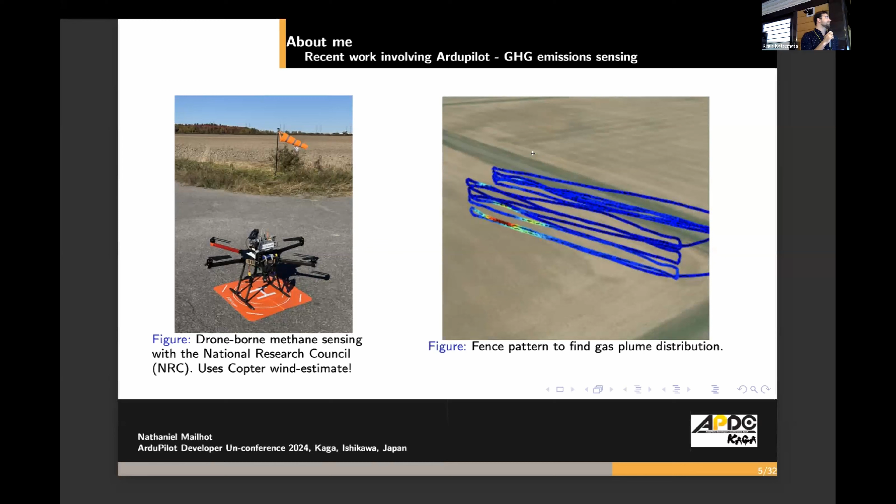With respect to my work with ArduPilot more recently, we've done work doing greenhouse gas emissions detection where we mount a methane sensor onto a drone and we fly patterns to try to characterize gas plume distributions. So that's one example there. And for some more recent development work for ArduPilot, we're trying to take the bendy ruler avoidance algorithm scheme that was used for the Outback Challenge in 2018.

And we're trying to convert it to use more of a Lua scripting framework. So if you're familiar with the ship landing feature using Lua, we're trying to use that as our example to start with and then build out the old plane avoidance features using bendy ruler as a Lua script or a set of scripts. So at this point now we have the obstacle generation working.

We can communicate between ArduPilot and Lua to discuss obstacle state. And we're able to see if it's clear to proceed versus if there's an obstacle in the way. And now we're trying to work out how to do the actual avoidance calculations and control using Lua. And so that's what we're working on now.

Okay, so to my development work, this here is our electric unmanned weight shift control aircraft. When I say weight shift control, I'm talking about hang gliders or air trikes. So completely different than the normal fixed wing planes that most of us use for ArduPilot. Why these? It's just flat out, no one's done it. And we think that they have some pretty interesting qualities that are worth developing for or to use eventually.

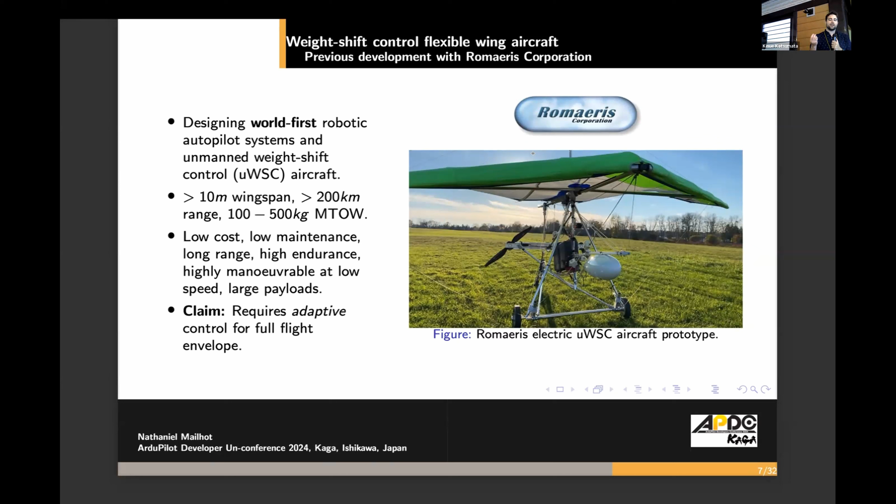They're extremely low cost. They're extremely low maintenance. They have long range, being a larger plane, and high endurance since they're a glider. And you can also maneuver them at low speeds thanks to their weight shifting control and the large kite wing on top. The challenge with these aircraft, though, is it's very difficult to model a flight control, partially because nobody's done it, and the aircraft dynamics themselves are quite nonlinear.

So let me explain what I mean by that. These aircraft, like I said, they don't have control surfaces. It's a big kite, and you're shifting your mass underneath to try to change your attitude. And you're moving your mass sitting in the seat under the wing in free space. So you grab the bar, and you're literally doing like this. So it's a completely manual control.

There's not yet fly-by-wire systems to control aircraft like this. They just flat out do not exist yet. And part of the challenge that the company perceives, company being Romaeris, is it's tricky to learn how to fly these as a pilot. So even if you're an experienced or seasoned fixed wing pilot, when you then go and try to become a weight shift pilot, it takes tens or 100 hours just to convert your pilot brain from fixed wing to weight shift fixed wing.

And a lot of it is fly by feel. Putting that in a technical way, there's substantial time delays to the control, and you have to be precise. So you can't be too slow and you can't be too fast. You have to be just right, to put it in a fuzzy sense. Flying these is a lot like driving a motorbike. Like you have to kind of lean into your turn and then lean out to turn correctly without falling over. And that's actually a challenging control problem.

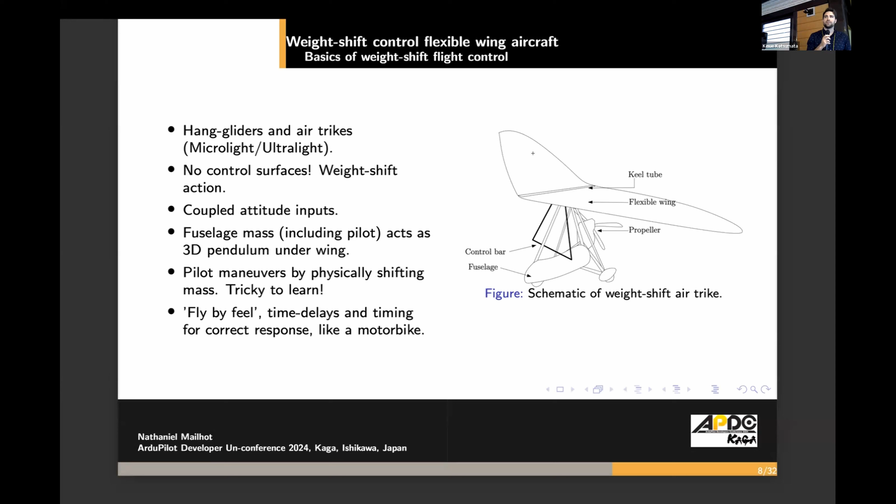So just to drive the point home, here's an example of a banking turn. Your pilot applies a force on the control bar. You shift your whole mass under the wing one way. And then after a couple of seconds, the wing starts to rotate and you initiate a bank. It's a bit more complicated than that, but that's the basic idea. You're creating an imbalance that causes the attitude of your wing to change. And then you have to get yourself out of that changing imbalance that you just started to put yourself back into a balanced state or a trim state.

So our development, it was tricky. It's like, no one's done this. There's no hardware for it. There really isn't much literature on it because no one's done it. How do you start? And so we have experimental and shop efforts, but part of the problem is it's expensive. We can't take a big risk you normally could for prototype development because we're not quite sure how to do it and we don't want to wreck our wings. And in the case of manned aircraft, we can't put the pilot in harm's way.

So one idea was obviously, can we use simulation to replace flight testing and development? And the answer obviously is no. You can't just simulate your aircraft and say, yeah, that looks good, it'll work in real life. You just can't match everything that reality will throw at you. But it does present an opportunity, which is you can refine your models as you go over time to try to get closer and closer to real life.

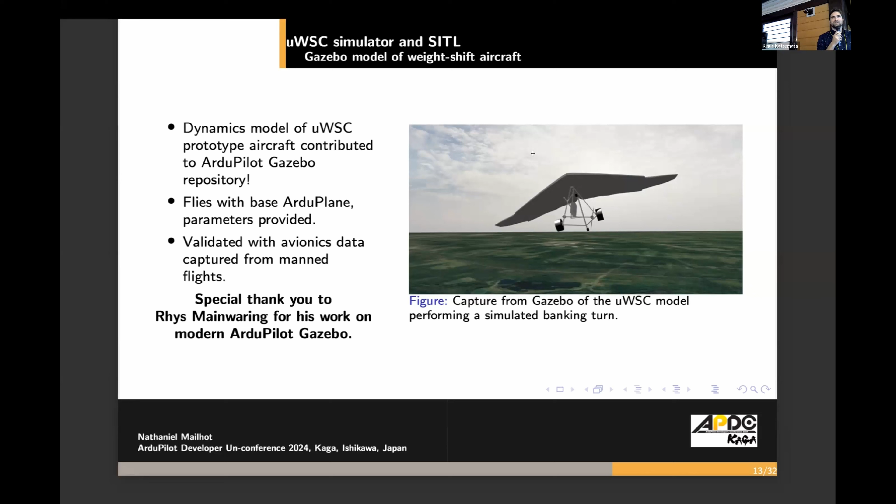Well, before that, I just want to say if Rhys is listening, special thanks. He really helped out with this work and kind of helping me get up the learning curve. And not only that, I think he's been kind of the sole Mac OS Gazebo developer guy the last few years. So big shout out to him if he's listening. And if you know him, tell him I said thanks. Yeah.

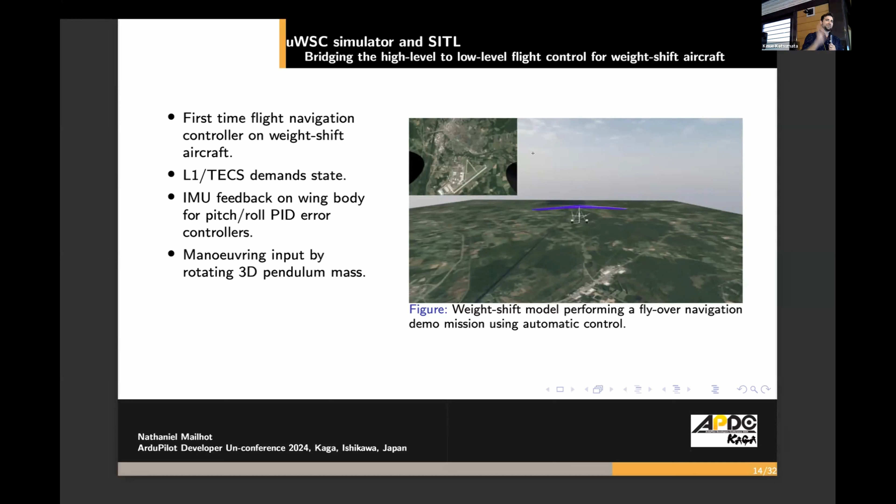And what's important to highlight is unlike the fixed wings with control surfaces, the tricky part is our control has to move a pendulum swinging underneath the wing in a certain way. So it's a little more tricky from a dynamics perspective than what you would normally just say, here's my model for my control surface. And if I do this much command, I'll get this much response at that speed.

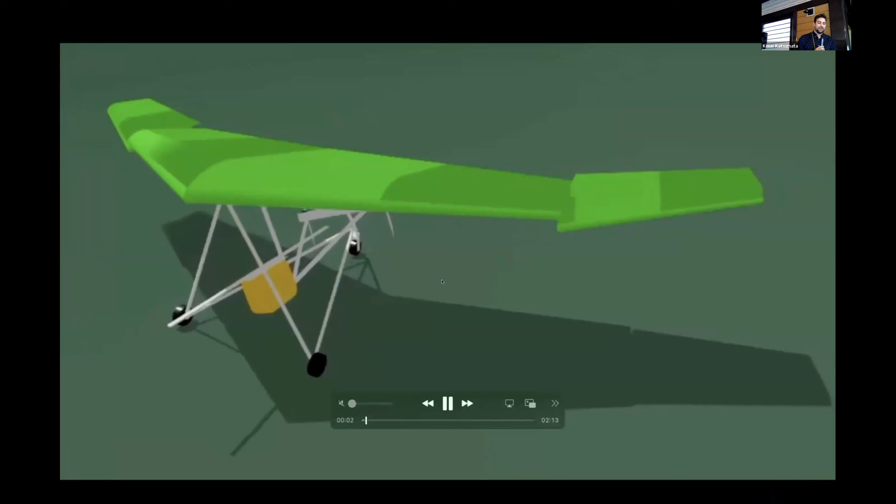So just before we get too into it, just a little video break. I wanted to pull this up just to show an example of a city environment in Gazebo. And we're flying little planes, like a demo mission using Gazebo, or maybe you have some visual sensor of some kind. So then here's the unmanned weight shift control model moving the pendulum underneath in roll, then in pitch.

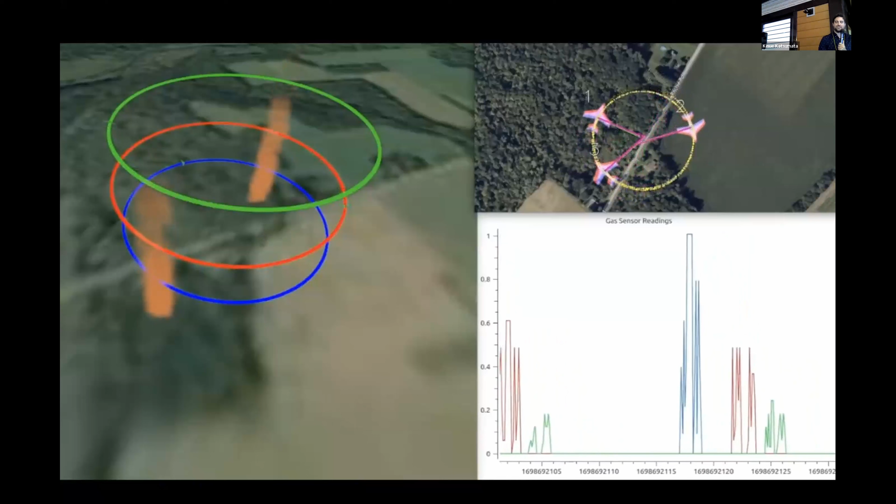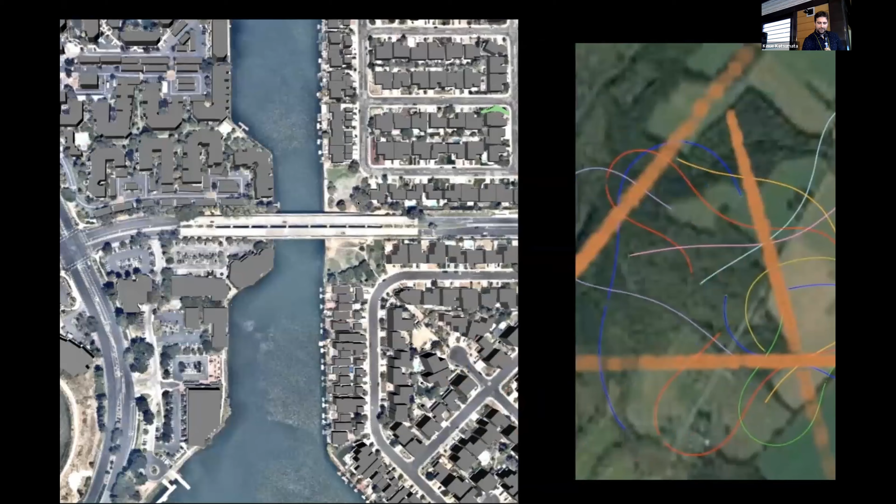And lastly, here's kind of the long-term vision. If I have a whole bunch of really cheap planes with long range with gas sensors, can I just drop them into an area of operation and coordinate their flight to characterize whatever's going on in the area of interest rapidly? So that's kind of the long-term vision I have for that work. So each of those lines is a trajectory being drawn by a plane. To the presentation.

Like I said, we flew real flights and we put ArduPilot on the aircraft in just a monitoring mode. And we collected logs from the flight. And we used that to validate our simulation model's accuracy. So here's one sample. We actually track quite close in both the altitude and the 2D ground track projection. And that held for the majority of our missions.

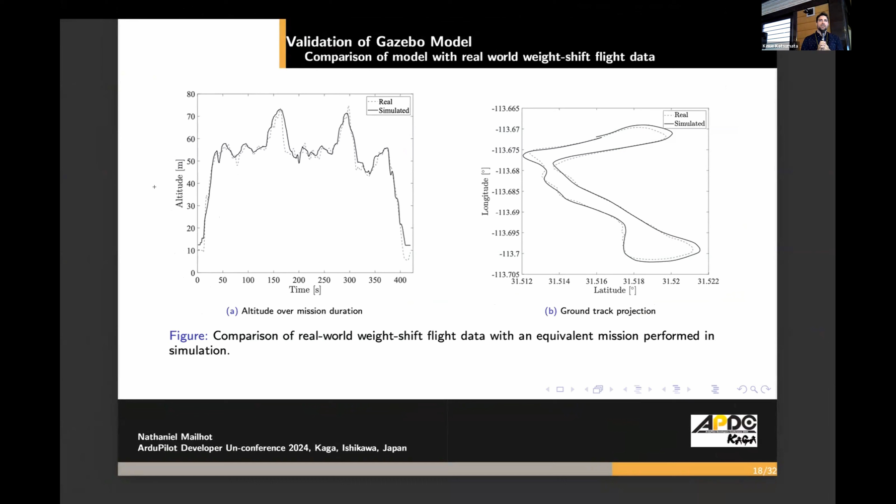Here's a comparison of parts of the 13 flights all put together. So a level section and then turning sections that we defined, just to show, hey, yeah, whenever we have these two parts of the flight that we care about, how well do we track them?

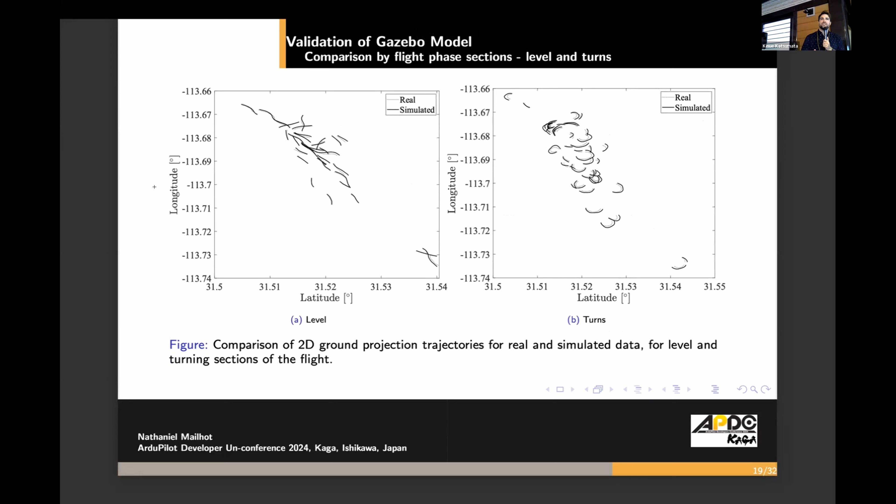Landing and takeoff. So you can see a divergence here. In the case of takeoff, since it's automated and simulated, the takeoff is like perfect each time in Gazebo, whereas in real life, there's variance from the human pilot. And then for landing, different problems. The landing approach depends a lot on just how the pilot decides based on the wind conditions to descend and then slow down and touch down.

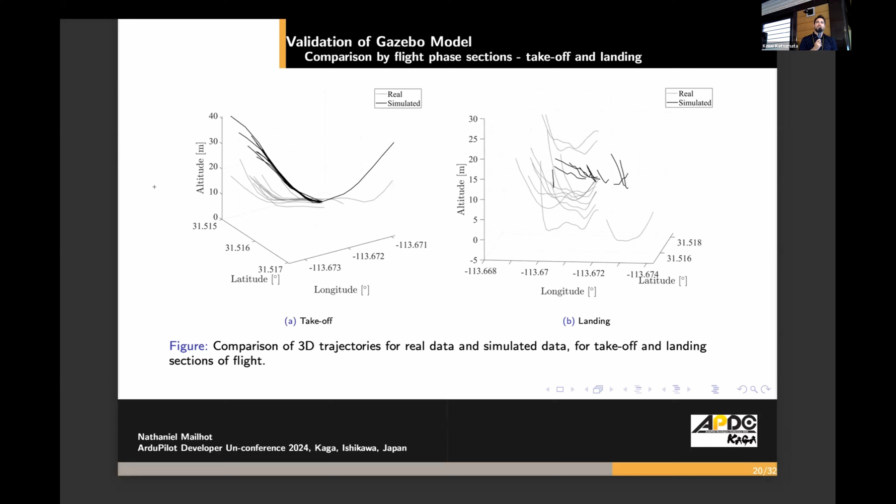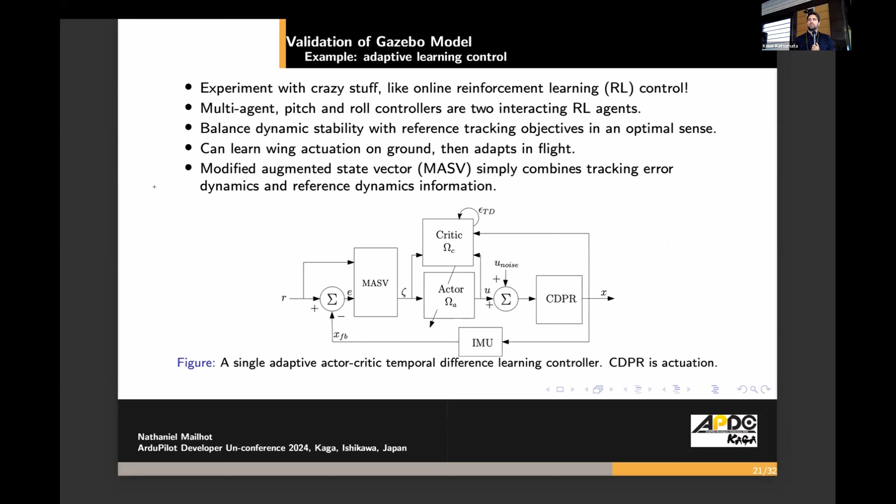And then using Gazebo lets you do crazy stuff. So in my work, my primary focus for my PhD project at the beginning was implementing an online reinforcement learning scheme. I won't get too much into it, but in a nutshell, the controller I'm really proud of takes a simple combination of dynamic stability and tracking error information and combines it together into a set of information that your online reinforcement learning learns against.

And this online reinforcement learning algorithm is implemented directly on the flight controller, on a Raspberry Pi with a NavIO 2. So it doesn't take much. And the reason that works is because we're using something that's not super commonly known called temporal difference learning. And it's based in a type of theory called approximate dynamic programming.

So I just wanted to call this out because I think there's a lot of attention on learning where you need a big, heavy GPU and a computer and offline training and like 100 hours on a stack. And these methods are meant to be used in real time. So you could incorporate a learning agent with your control to try to suss out some particular behavior that eludes you.

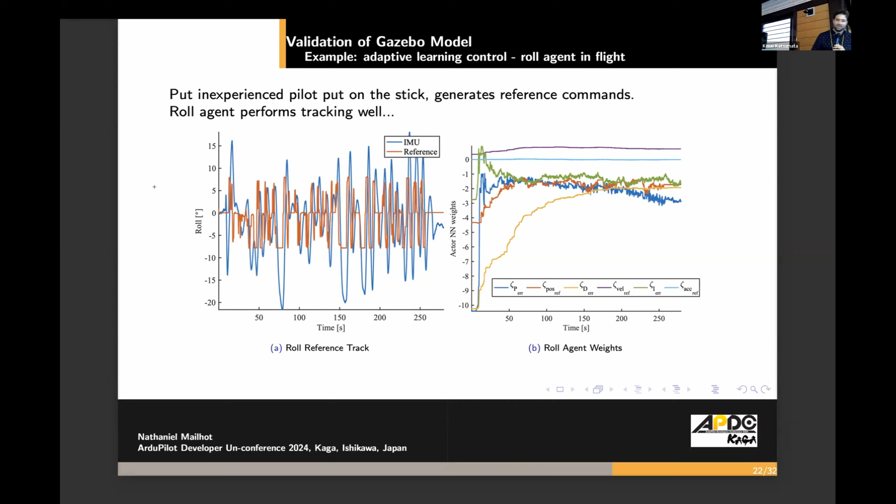Meanwhile, for our pitch agent, the other controller, because we only need roll and pitch to fly these things, it kind of learned pretty quickly, hey, don't follow the pitch reference angle the pilot's giving you. It's junk. There's a limit on it too. So instead, I'm going to try to just fly this thing and take the pilot's input as a suggestion, which sounds weird, but I remind you, the whole point of reinforcement learning is not to solve errors, it's to balance multiple objectives. As long as you can define what you mean by an objective mathematically and you have data, maybe you get a result.

To the real meat of the presentation. This last year, we had a really big challenge, which was, God damn, it's hard to actually develop prototypes of full-size 100 kilogram plus aircraft that are unmanned. Big challenge. We're not at that scale yet. So we pitched, what if we made a miniaturized version? No one's done this. The closest is there are RC models, but the RC models don't have formal analysis, and there sure aren't ArduPilot solutions for those RC models. Or if there are, I'm not aware of them. So now we've done that.

Again, I just want to remind you, part of what makes flying these aircraft difficult is you have these aeroelastic properties of the wing that kind of dictate how the aircraft responds as it flies and changes speed.

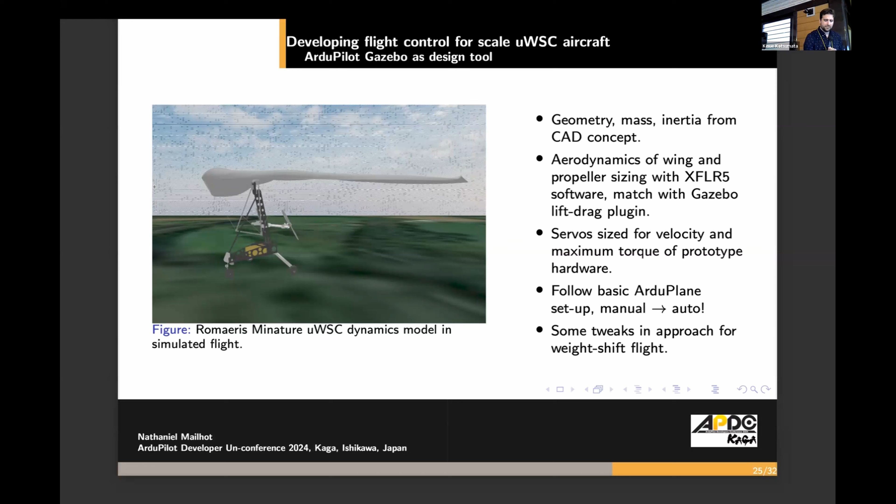There's no other tweaks. The closest thing to a tweak would be, there are things you have to do to the parameters slightly differently to get it to fly more like a weight shift aircraft compared to a fixed wing. And doing that, you can get a prototype that flies pretty okay. I think there's work left to be done on what other adaptations to the control you have to do to support different parts of the flight envelope for your weight shift aircraft.

But good news, if you don't mind not having a highly performant aircraft, you just want it to fly at low roll and pitch angles and reasonable speeds, you can pick a set of PID gains that works, and you should be set. So yeah, back to the development of our prototype. The initial maiden flight of our aircraft was based off an autotune in Gazebo. So we took the model, we autotuned it. We said, okay, what did it spit out? And then we said, we're kind of scared of some of these parameters it spat out. So how about we make them a little bit more conservative or weak?

And it flew. It flew fine, not great. And we could keep it in the air though, which was impressive on our first attempt. We developed what we called our input replay script. The basic idea is we took the literal RC input from the pilot and we just fed it back to Gazebo, trying to match it to real time. It's really crude, it needs more work, but what you're seeing here is the RC input of real life to simulation.

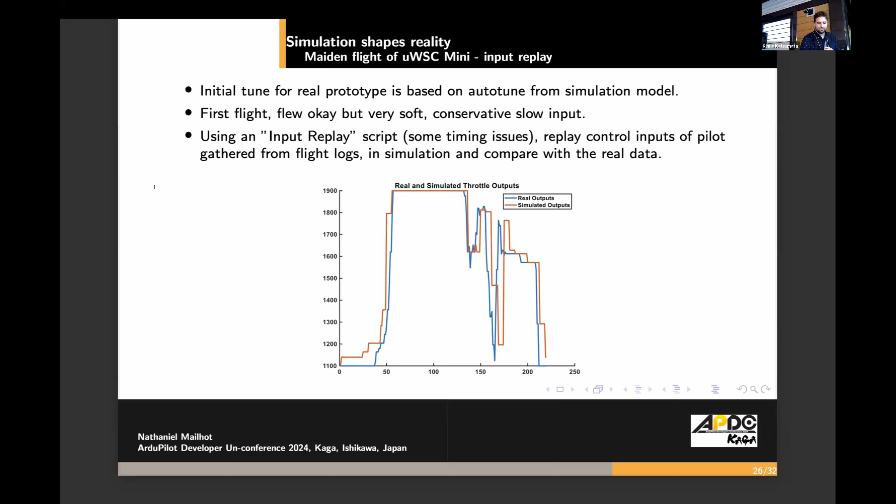This method will work, but to a point, because as you continue your simulation of your dynamics, eventually what you simulate will diverge from real life. It's just a fact. It's too hard to match things precisely unless you have an excellent model and really good feedback control to keep it where you want it. So here's an example from our first maiden flight, compared to a simulated version of the maiden flight. I want to stress that the only thing we're giving the sim is just the RC inputs. Otherwise, the sim model is just doing what the RC input says to do.

And yeah, it follows the dynamics reasonably well. So speed, same shape, different magnitudes. Altitude is almost perfect, which was nice to see. And then pitch and roll are pretty close. The roll looks kind of funky, but that's only because, sorry, the top right one, that's only because the roll angle in real life went over 180 at one point.

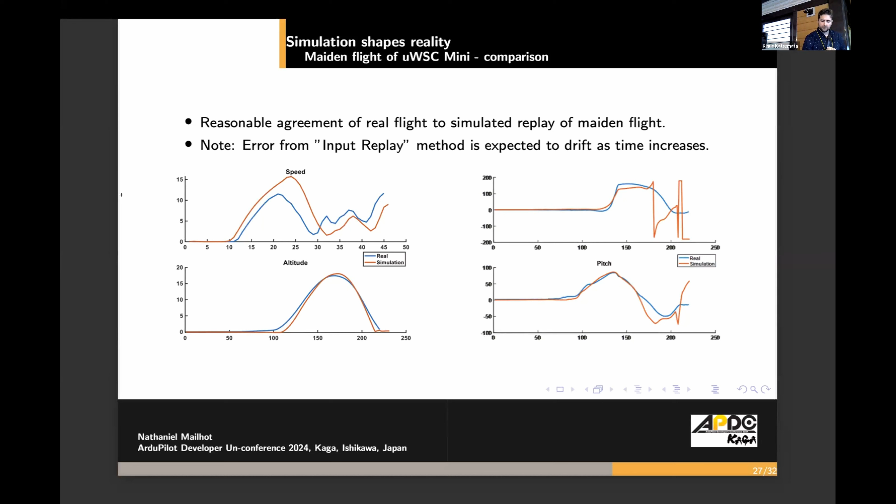Here's one example that was really fun. We did one flight test of our prototype and we flipped it. We took off, we put too much throttle on it, and the thing flipped. Not great. And so we were sitting around scratching heads: what did we do? Why did it flip? We haven't flipped it before. We've done the takeoff kind of the same each of our flight tests, but that time we flipped it. Were the winds bad? And our hypothesis was maybe there's just too much throttle. Maybe the thrust is oversized, and the pilot used too much throttle.

So instead of head scratching, doing some napkin math and then trying it again in real life, we said, how about we test it in simulation first, just to confirm. And sure enough, we do input replay, and we're able to match the dynamics of the flip. For me, it was a shock. I didn't think the crude lift drag plugin in Gazebo could do stuff like that. I thought it would just say, oh, you're fine, keep climbing, go pitch up more. So yeah, satisfying to see. So that's a front view and that's a side view of the same loop.

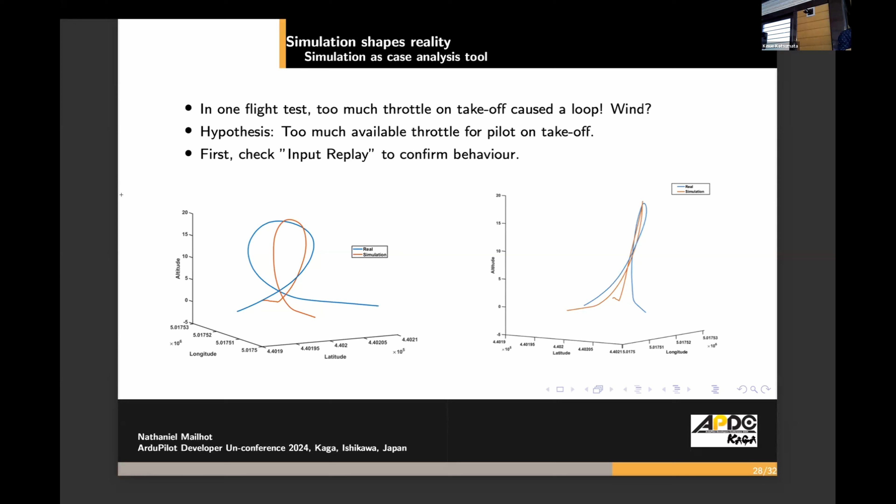And they line up pretty well. So then we say, well, let's just drop throttle, put a limit on it, see what happens. So now what you're seeing is a before and after. So before is our previous figure of the two loops in sim and real life. The after is the simulated loop if we apply the throttle limit.

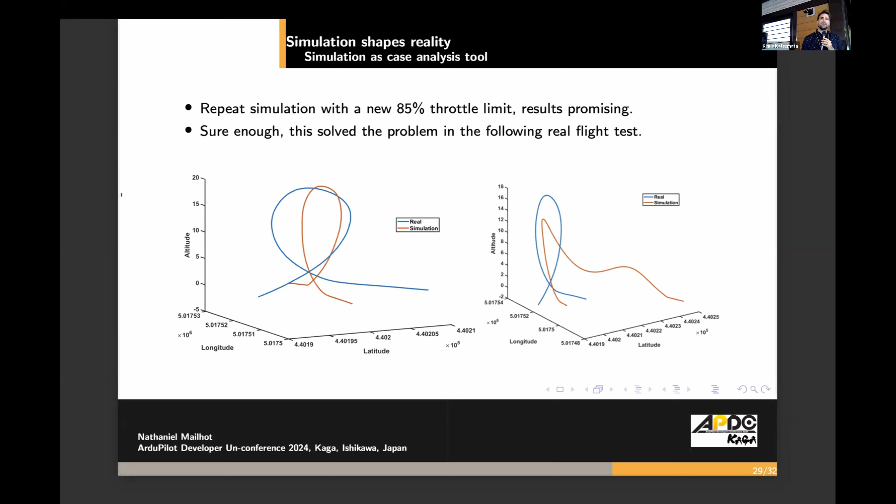And what do you know? It takes off and it kind of floats and then it hits the ground. Great. If we had done that, our flight test would have been great. We wouldn't have done a flip and hit the ground. So we did it. That's what we did. We put that in real life. And what do you know? It saved us a whole wasted day of flight test, damaging our aircraft, having to repair it. So the cost saving, both in time and money, is immense.

So yeah, I can't talk too much about the flight test campaign from this year, but it's been very successful for us. We've gone from a simulation model that we cooked up in November of last year, and this summer, we've gone to a point where we have a totally novel prototype of this aircraft flying in auto mode. And what we're trying to work out now is how to do auto landing and then auto takeoff. And if we can do that, that's a workhorse. We can probably go do revenue jobs with it. We can go show it off. So

I want to really stress to the room of developers or interested parties, I think the use of Gazebo or equivalent dynamic simulation with ArduPilot remains untapped. And I understand part of that is there's a steep learning curve and the utility of it might not be clear. But for us, it's provided an essential tool to make our development more rapid. And that's because it gave us a way to do initial tuning. We can do post-flight analysis using simulation, and we can even consider different case studies in sim rather than in real life.

And so yeah, on the left side there, it's just from last week. We did an auto mission and then an auto land attempt. It's hard to see on this. I'll post it in Discord later, but I'm really proud of that image. It flew great. Our L1 controller needs tuning, but it tracked the waypoints, it kept altitude, and then it almost landed really well. And if you've worked with auto landing, you know it's a little tricky.

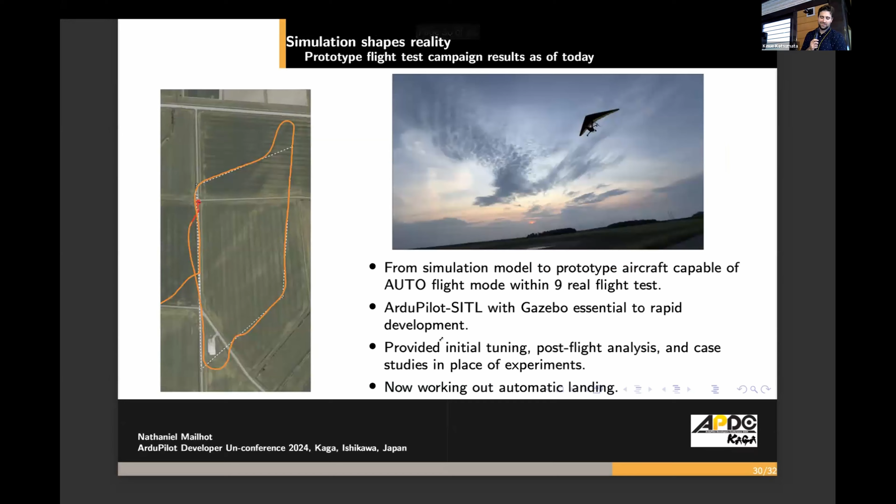I was curious about what this vehicle would be like to fly in manual mode with RC, where you don't have the feel, the feedback in an aircraft like this. I've never flown one, anything like this. I've never flown a hang glider, but I imagine, like you described at the beginning, the feel of the aircraft on your body is very important. So have you done much flying of this in manual mode with radio control? And in which case, how hard or easy is it to fly in manual mode?

Okay. So I left it out because I wanted to focus this on unmanned applications. But the earlier development with Romaeris was really on optionally manned actuation systems. So how do we do a fly-by-wire system or a robotic system to replace a human pilot? Basic math there is you take the pilot out, you put in stuff. You can do more with it. But the CTO of the company is a weight shift pilot himself. It's a hobby for him, really, the company. And we're trying to build a whole company around his hobby.

So why I'm mentioning that is most of our bandwidth early on was just how do I make the fly-by-wire system give feedback? How do I make it feel so that I can sit there on the sticks? And the fact is, we don't have a way right now to give tactile feedback. So what we've had to do is develop force admittance systems for the full-size aircraft. So in other words, like a cable-driven robotic scheme that lets you vary the amount of force you apply to be a soft touch or a hard touch, depending on if you're in a really bad state and you need to get out of it versus if you're just trying to do a control and to remain gentle.

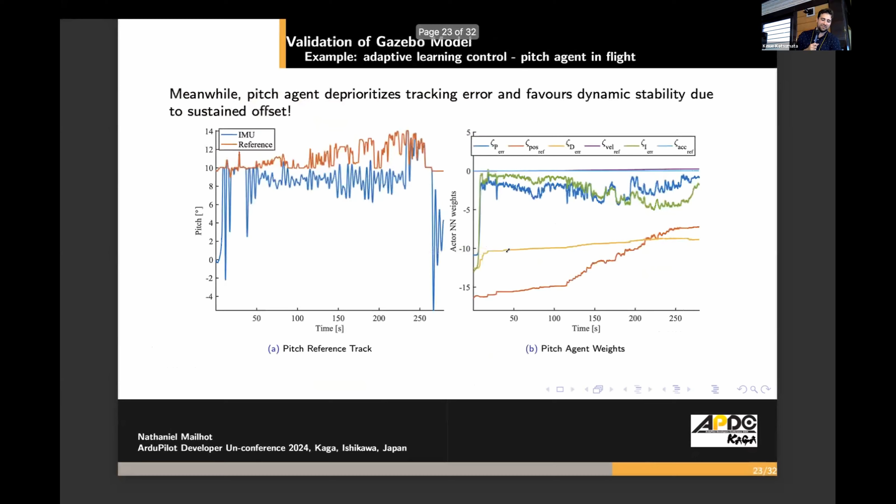So with reference to your comments about flying on stock ArduPilot, where did you mount the flight controller, or specifically the IMU? It's on the wing. Is that what you're asking? Yeah, that's exactly what I was asking. So in fact, if you really think about it, when you're flying these bad boys, you're not flying the fuselage that moves underneath, you're flying the wing. You don't really care what your fuselage is doing for the most part, you just want it to move your wing correctly.

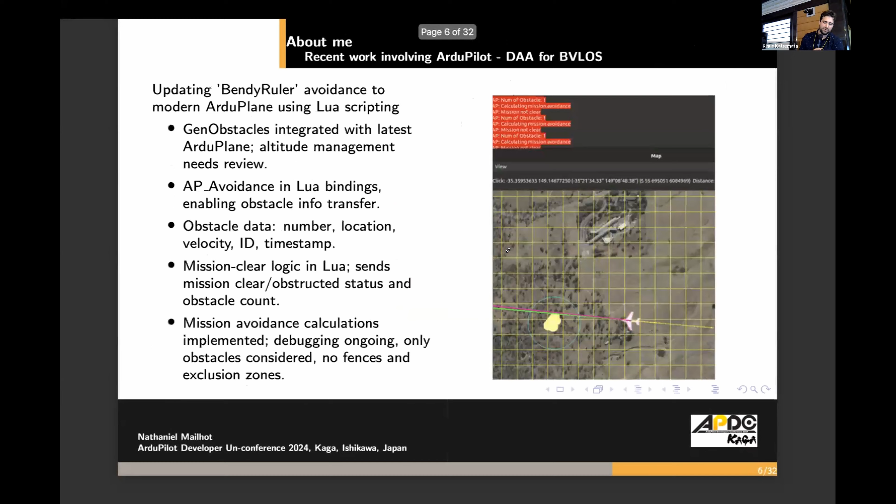So my core research work, from before I became a drone engineer, was on the learning system stuff. So this is a model-free control like ArduPilot, and I don't really care what the weight shift is doing when I'm controlling this with this controller. I just want the wing to stay up and stay stable. So what really matters for this controller design is how you couple the information of the dynamic stability from the reference dynamics with the IMU error or state error from the EKF, and then to control the wing.

Thanks. Geez, busy crowd.

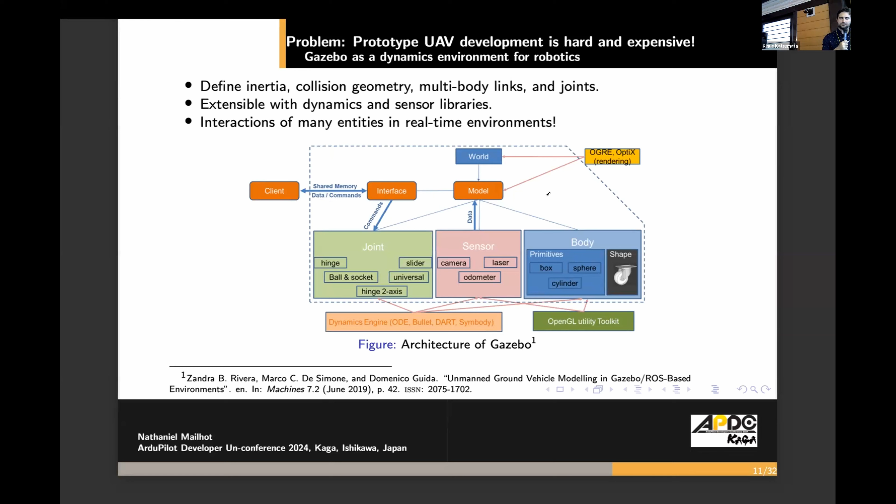At the end of the day, Gazebo doesn't care where your inputs are from. You just need to provide an input. So yeah, I haven't run into issues with my flight controller software running poorly in simulation, like in SITL. Really, my focus has been on the dynamic simulation side. So I want to highlight this slide here.

It's a philosophy. It's saying, can I use simulation to replace real flight testing? Of course not, no. But if I refine my models over time as I collect more data and I improve them, eventually I'm going to come up with something that's closer and more useful to the real one. So in some sense, giving your dynamics simulation access to real flight controller hardware is probably the better choice, because you're not modeling anything anymore. It's just the bloody real thing. Just use it. So I think that's a good approach. Is that a satisfying answer though?

Thank you. No problem. My pleasure. I think there's two. There's Michelle and then one in the back. Running a little short on time. Yeah, a whole hour almost. You're making me work, Randy.

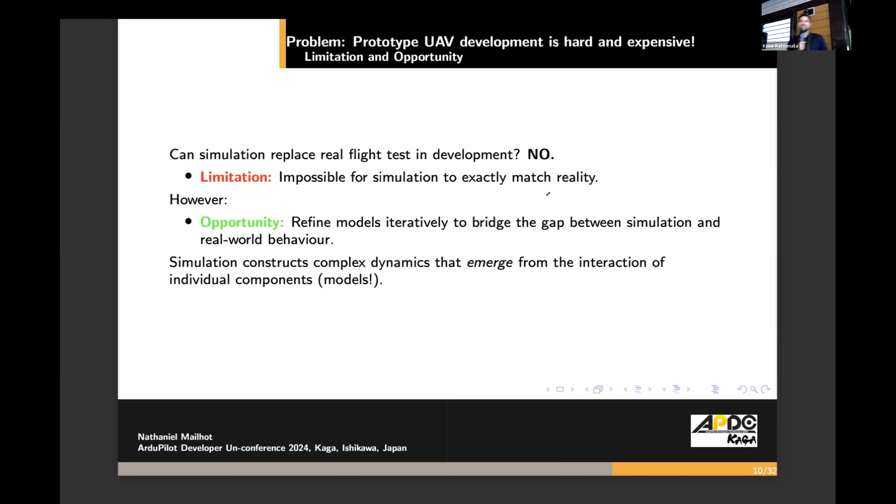Last question for Michelle. So I was just wondering, because the manned ones are quite mechanically complex, how you did the mechanical part of it, because servos, I assume, would be not strong enough. So the full size and the miniature have kind of two different development tracks for actuation. In the case of the full size, I didn't talk about it, but we can talk a bit more after if you like.

In a nutshell, I used what's called a cable-driven parallel robot to provide me with flexible admittance. So it can be stiff when I need it, or it can be a soft touch when I need it. And I find that works well for the large volumes of the full-size aircraft, rather than a fixed link arm, which would be very hard and expensive to design for the application. So a cable-driven robot, if you think of a sports stadium camera gimbal set up on big cables, it's basically that. And I can do that with just a set of 4 actuators. So it's very cheap.

In the case of the miniature model though, I cooked up this, you can't see it, but I call it a servo hang block that replaces the hang block. And it's an okay design. It definitely isn't the right design for the miniature. But the challenge is picking the right actuation scheme for the scale. So as you scale up, the servo hang block design would not be a good choice for the full size because you would need some crazy big and expensive servos for the small volume of the hang block. The hang block being the thing that joins the wing to the fuselage mass.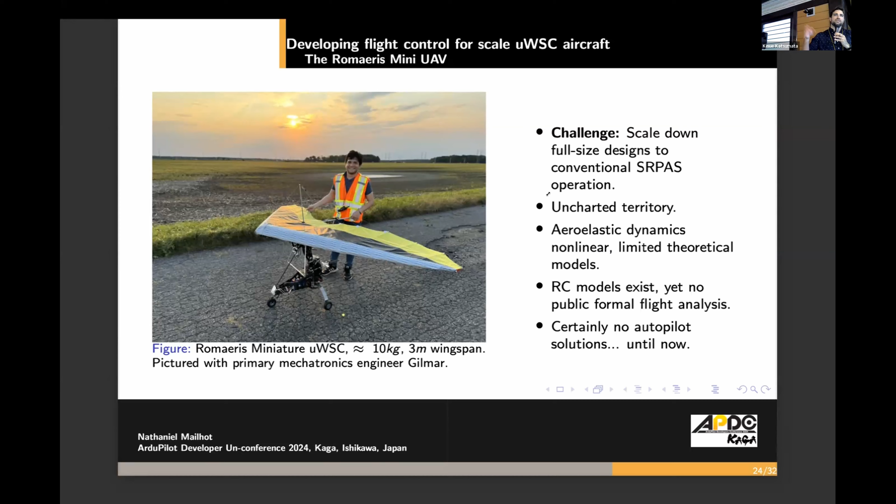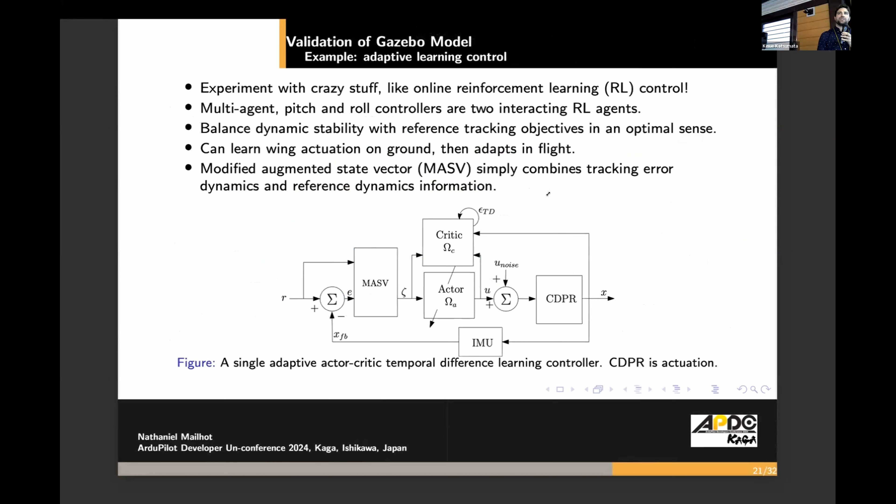In the full size, I'm using a cable robot. So in other words, I'm using different actuation schemes. And then what I'm trying to do is map my adaptive control action to be agnostic to what actuation scheme I'm using. So I don't care what actuation scheme, it just has to fly kind of the same, despite the scale difference. And so that's what this shows: an adaptive actuation scheme on the simulated version of the aircraft.

Cool, thank you. My pleasure. Okay, you want to wrap it up or do one more? Okay.